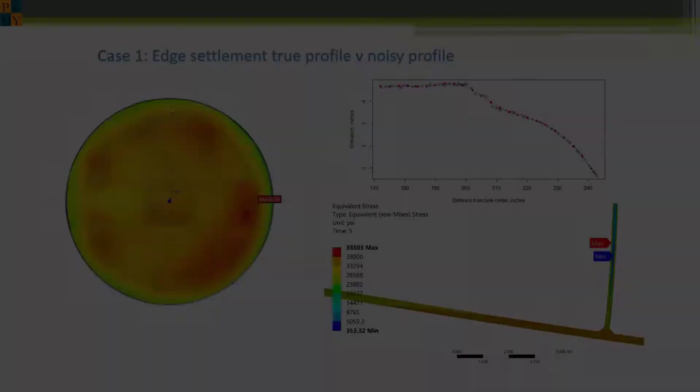This tank has an outer perimeter that is settling faster than the interior, indicated by the blue region. Here's a side view showing the bottom and the sides. The worst radial, shown by the blue line, is plotted on the right for a numerical finite element analysis study to determine if the stresses are excessive.

You can see the open circle points indicating the actual measured settlement at the worst location, including the noise. Filtering out noise is important because these points are not what is actually going on, and using these points would result in very high stresses, falsely indicating failure. But taking the noise out is a balance between locally applied statistical smoothers and actual deformations, which is where data, experience, and stats all come together.

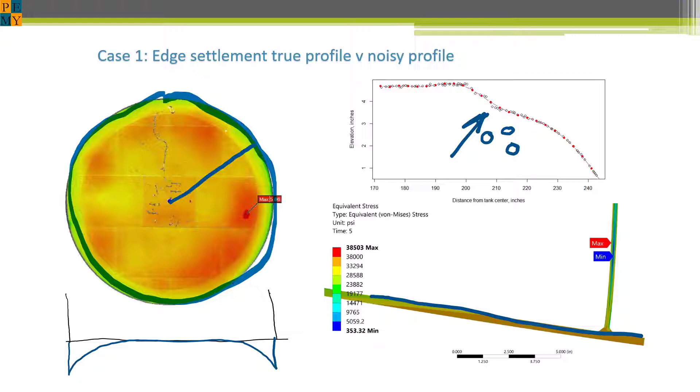In another settlement example, it is now relatively common to use laser scanning data, which instead of 8 or 16 points has thousands or millions of points. The example here shows a plot of laser scan data. The key point is knowing how to manipulate and analyze the data, which gives better and more accurate results.

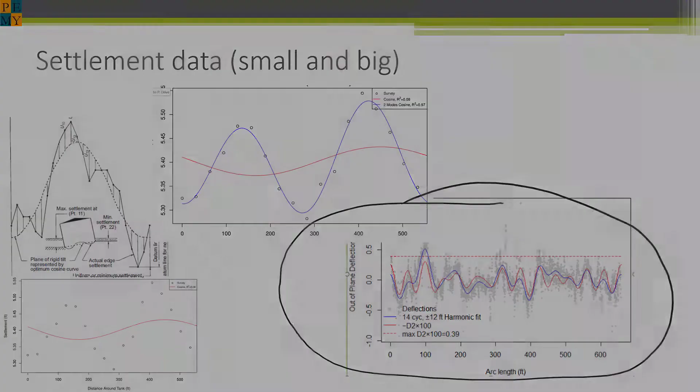Here we are trying to determine whether vendors of pressure vacuum valves are properly certifying flow rates in accordance with API 2000. A test was conducted where each vendor measured the airflow through the same orifice. The data was analyzed using what is called an analysis of variance, or ANOVA.

The results are shown with the red 95% confidence bands. You can see that vendors A, B, C differ significantly from vendors D, E, F. This plot shows how vendor bias, or systematic error in measurement, determines and dominates the noise.

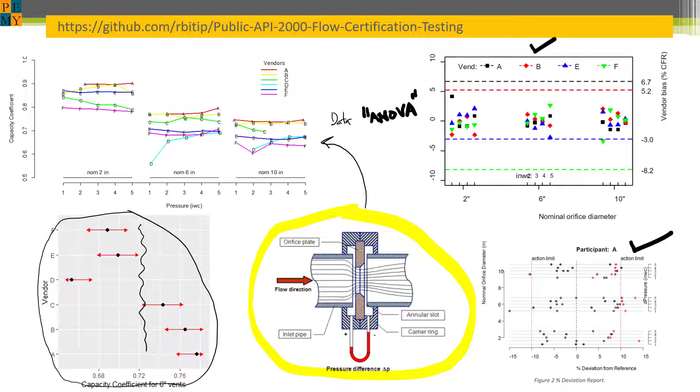Finally, we developed criteria based on inter-laboratory standards applied to assays to show how and why a gold standard is needed to set up acceptance criteria.

Imagine you were a surveyor hiking around in this hilly scene to measure the heights of various hills, and you also want to find the very tallest hill. This appears to be a straightforward task, but then a fog rolls in and visibility is shot.

To find the peak, you have to rely on the gradient or slope of the ground. At each step, if you move up, then you are more likely to find the peak. You can even reach the peak using this algorithm, but this won't find the highest peak. This is essentially the problem of optimization and the branch of statistics called design of experiments, or DOE.

Rotating a steel stud with pressure against a steel plate is a quick way to attach studs to tanks and vessels. However, the opposite side gets hot as well, and if this is done in equipment with flammable vapors, the question becomes: is the time and temperature sufficiently far away from the required minimum ignition energy to create an explosion in the presence of flammable vapors?

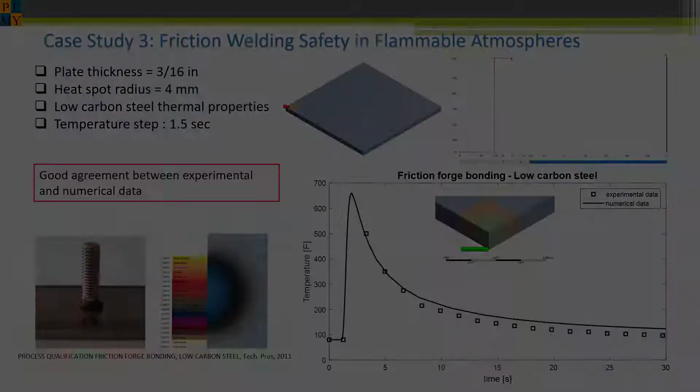Like the hill measurement problem, we want to find the boundary between ignitability and non-ignitability over the landscape of variables that have many hills. We even used an adaptive algorithm that reduces the number of trials to find the hazard boundary for this problem.

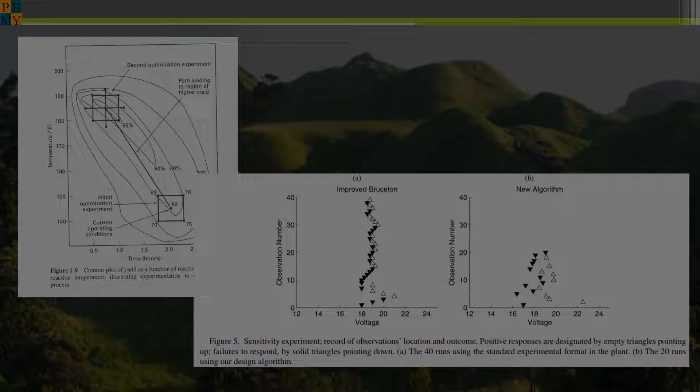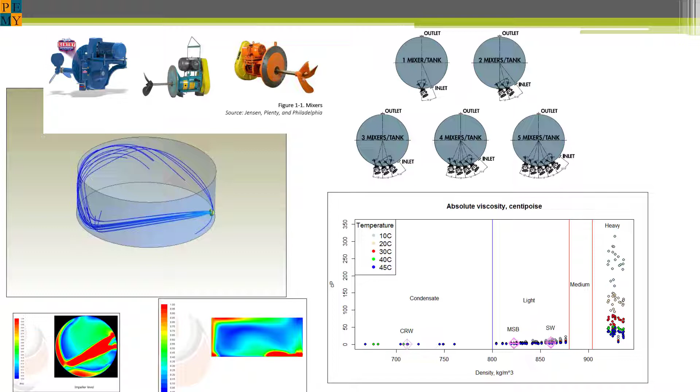Here's another DOE problem where the goal is to optimize the number, sizes, propeller types, horsepower, shear energy per unit volume, flow patterns, and other variables to minimize sludge buildup in crude oil tanks.

Earl Crochet and I co-chair API 656, meant to help tank owners and operators cope with the increasing natural disaster incidents impacting oil storage facilities.

We have been able to apply extreme value stats to a wide variety of problems. In this plot, we have rainfall data since 1900 for Fort Collins, Colorado. We get this plot where we see that the distribution of extremes nicely follows a mathematical pattern. It turns out that this idea widely applies to almost all real data distributions and is therefore something we can take advantage of.

Here's an example of an extreme value validation study we did on the Iowa River Basin, where the site of interest was Hancher Auditorium, a performance venue for the University of Iowa in Iowa City. This facility was originally built in 1972, then flooded out in 1993 and 2008, and replaced in 2016 by a new auditorium designed by Cesar Pelli. The new structure is 240 meters north-northeast and 3 meters higher in elevation.

The question we need to answer is, what is the elevation at the site? What discharge rate will produce a flood that reaches this elevation? And what is the probability of exceeding that discharge rate? In API 656, we show how to use extreme value stats to create plots like this, which answer this question.

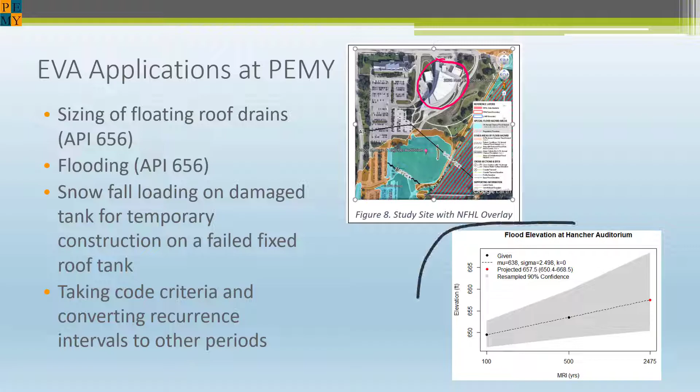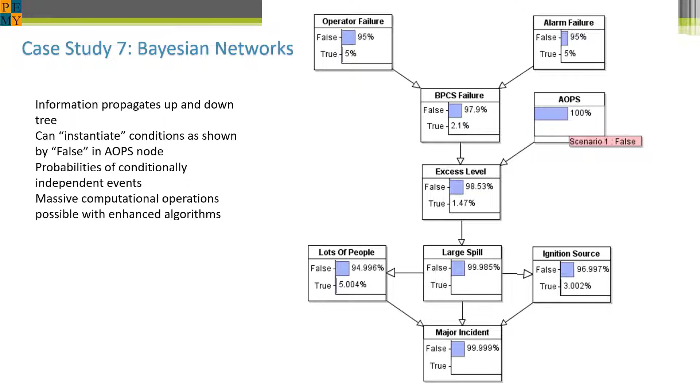The technical name for this is Directed Acyclic Graphical Network with Nodes and Edges. These graphs are used to represent probabilistic graphical models in Bayesian belief networks. Because of computational intensity, only in the last decade or so have computational algorithms become sophisticated enough to solve them.

In our last example, these large USTs are located in a highly sensitive environment. The facility owner has proposed a system of systems, including precision mass measurement leak detection, soil vapor monitoring, inventory reconciliation, inspections, and so on. If one sensor shows a leak but the others do not, what action should be taken?

We know that all sensor systems have false positives and negatives. Since a shutdown is extremely costly and disruptive, how do we fuse all the sensor readings into the best possible action based on all the evidence?

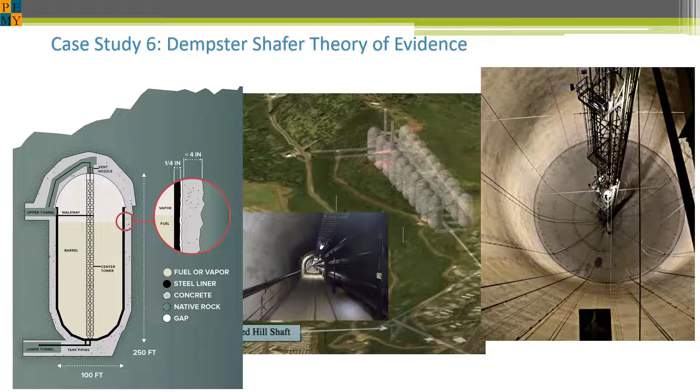In this case, PEMY proposed to the stakeholders that the best approach is to use evidence theory, more specifically Dempster-Shafer theory, which is a generalization of Bayesian statistical theory. The theory is complex, so we won't go into it. However, we point out that everyday applications for the use of evidence theory exist that require the best tools that data analysis has to offer.

I hope this has given you an appreciation of how the subject we all probably hated in school has not only revolutionized the world, but how it can even be useful in the world of not so glamorous, mundane engineering problems. Thank you, and see you next time.